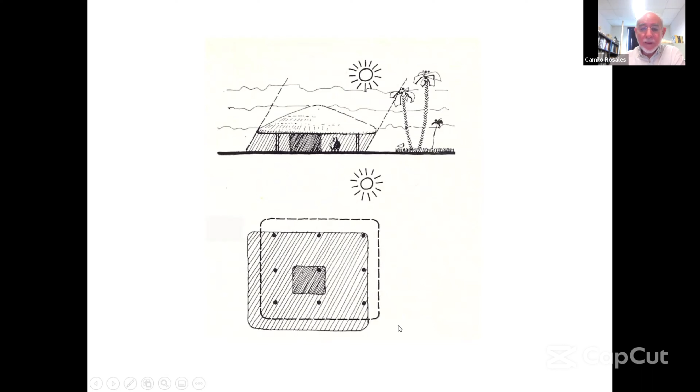So you can say that the tropics have two conditions that have been more or less common. Dry areas and urban areas in traditional architecture have what is called a courtyard house, surrounded a patio in the middle. But in rural architecture, the middle portion is the one that is private, and the surrounding area is shaded outdoors like corridors. This is not uncommon in the Americas. Probably Brazil has farms and rural areas that are not dissimilar.

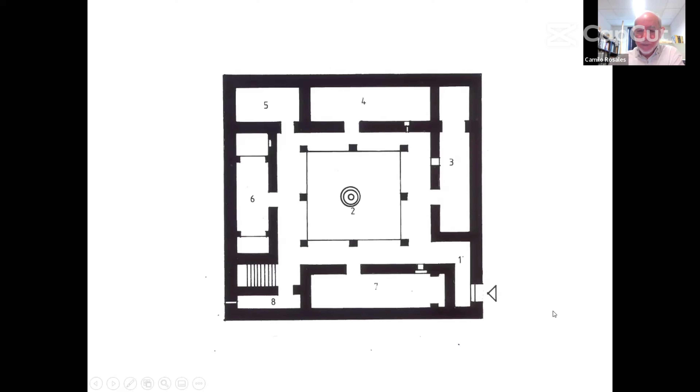So an example of a courtyard house that is very common in the Americas, with rooms and a corridor surrounding a central open space. And you got an example in Mexico, which is fairly dry, a good portion of Mexico, and not dissimilar than southern Spain.

The other one, which I have by the letter B, is not uncommon for us in the Americas. Some Indian tribes use this kind of architecture. Peasant architecture is like that. And there are versions that are more established that are not uncommon for Spanish and Portuguese settlements in rural America.

Well, I'm presenting this because the projects we have deal with this form of thinking, in which the structure is either surrounded by open space and a large roof. And this is the project we sent to Washington and the first two houses that I'm going to show you.

This is the competition that happens in Washington every year. It's for solar houses. And after the success of this one, there's been others in Europe, and I understand there's one in South America as well. In this, there are 20 universities competing for a prize, and they give you a small lot in Washington, and they give you the dimensions of the house. But the house has to exist without any support from utilities from the city, especially electricity. No electricity connection, no water connection. And so they have to be, as they say in English, off the grid, outside the grids of utility lines.

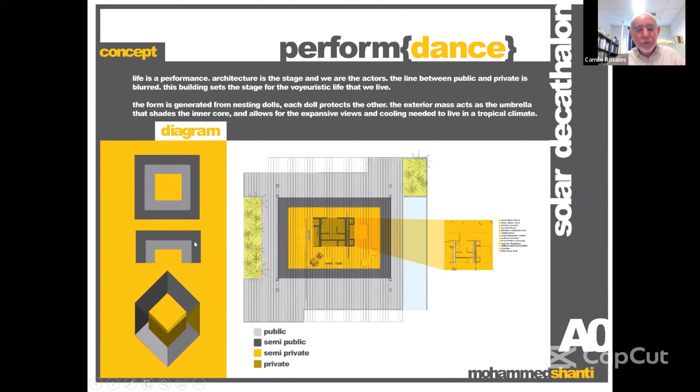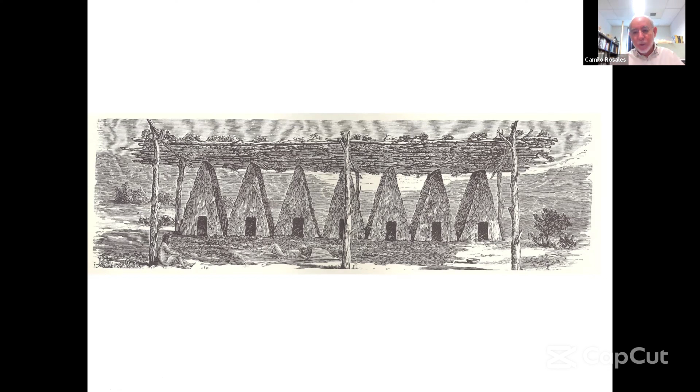And so this works fairly well if you think that this house has to be built in Miami, which is semi-tropical, and then transported to Washington, which is more temperate.

And so this is the diagram of the house with two roofs. The first roof with the sun roof is actually made for photovoltaic cells and capture energy in here. The second roof, which is the one in yellow, is the rain roof, which closes the building.

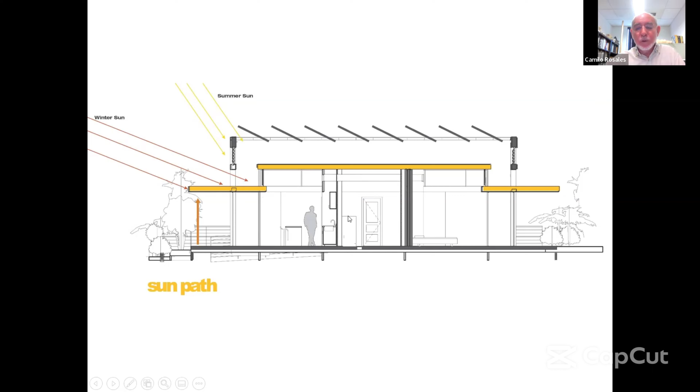And then between the corridor outside and the living space inside, there's an area in between here, which has two layers of glass, one layer here, another layer here. And then the middle portion, which is private, is where the bathroom is. So you get the plan of the house with two layers of glass, gray areas like some type of corridor. This pinkish area is the area for living, bathroom, and the mechanical system is here. And then you have a broad terrace around it.

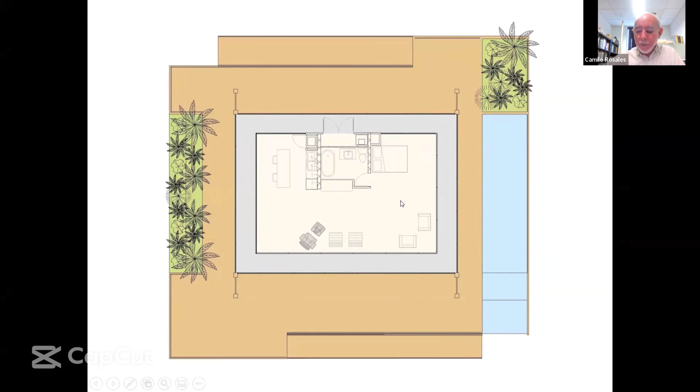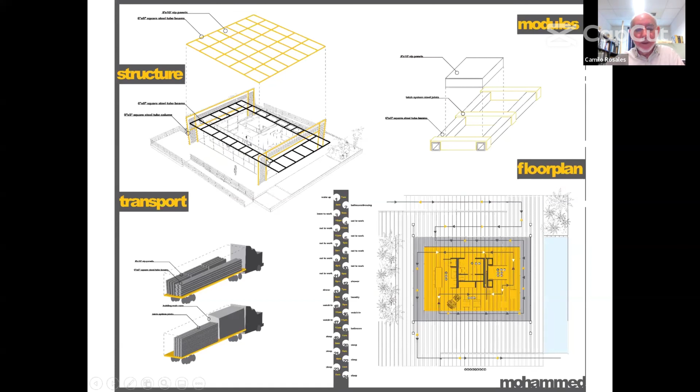And this is the way the scheme was planned. And I have a whole series of diagrams in which the thing has to be built in Miami, dismantled completely. It has to be done in prefabricated pieces, put on a truck, and sent to Washington.

And there's some more diagrams of what happens in winter and summer, or when you have cooling and heating. This space in between can open or close, and so allow breezes to pass through and cool the house. And this can be open and only one close, or you close both systems, and then they retain heat in the case when you need heating.

This is for water collection in here on the right-hand side. And the top shows the two suns that you have for different latitudes. The summer sun, more likely, Miami is more vertical, and this is more tropical. And the winter sun, which is more on temperate areas. So the building was to be designed that way.

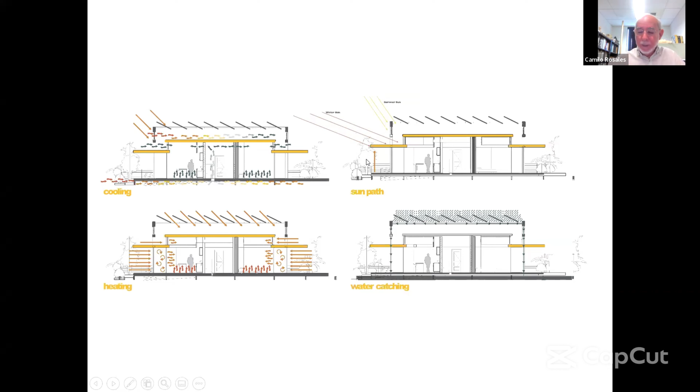And this is the way that this whole scheme is made into pieces, so it could be transported. This is particularly interesting, and I don't know what level of education you have at this point in architecture, but you may have encountered these systems already.

We use two solar systems. One that is called solar thermal, which is the one you see on the screen. This is to heat water. And the other one is photovoltaic, which is to capture energy from the sun and produce electricity.

So this one produces hot water, which is immensely important because hot water is not only for bathrooms and in your shower that you have in this tank. It also can be transported to what is called an absorption chiller, which uses heat to produce air conditioning. So with hot water, we produce air conditioning. And air conditioning can be done, then from this point, the air handler that you have here is made into ducts and goes to space as fresh air.

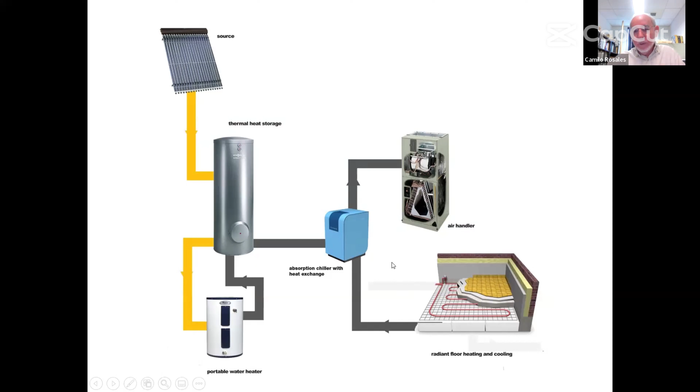But the same hot water can be used in winter for a radiant floor. So you have the piping in the floor and it produces heat. So the same source of hot water can do this couple of miracles. On the one hand, it produces heating for a northern latitude, and on the other, it produces also air conditioning.

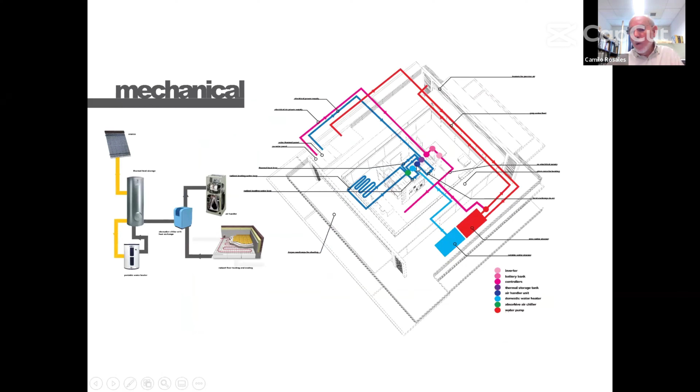So you get here a diagram of the two systems operating from the mechanical room. And I won't talk too much about this.

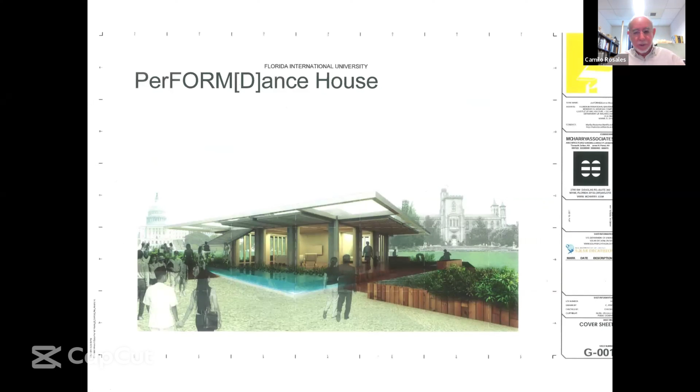And this is the last picture of that scheme that was not selected. The one that was selected was this one, which was cheaper to build. The other one was actually quite good. It had a lot of support, but then the group jurors, because we invited a group of people to decide on this, decided on this one, which was a little simpler.

And this was built. This is the one we have right now at FIU after moving in, washing and getting some repairs. It was permanently built on our campus at FIU, and it's serving as the Office for Sustainability.

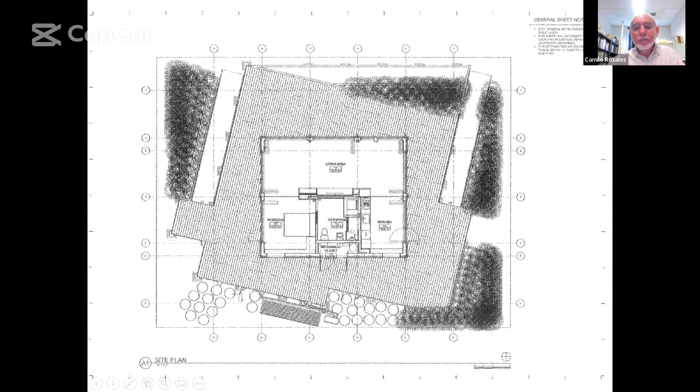This one is kind of intriguing too. It's got some interesting points. The first thing is that they look very much similar. It has a private area with the bathroom and an area with a mechanical system. All the living area happens around, but it has only one scheme, not two like the other one. And then a large terrace around.

It has photovoltaic cells as well, and it's got a large solar collector for hot water.

But this did differently than the other one, having a great deal of insulation. Instead of two glass skins like the first house I showed you, this has a very thick layer of solid insulation that prevents this house from overheating or overcooling. It also has louvers that open and close for shading.

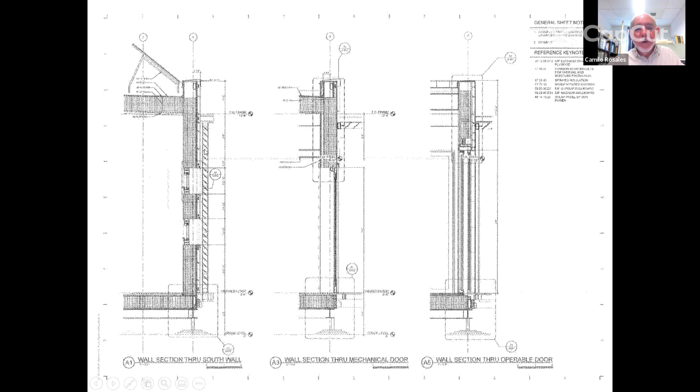But also in Miami, we have hurricanes, as you may know. So these shading devices also act as hurricane shutters. You see the hurricane shutters there. If I use my pointer again, these devices roll inside and then come down, collapse down, and close the glass. So it works for hurricane-prone Miami, and also as a shading device for whichever latitude we choose.

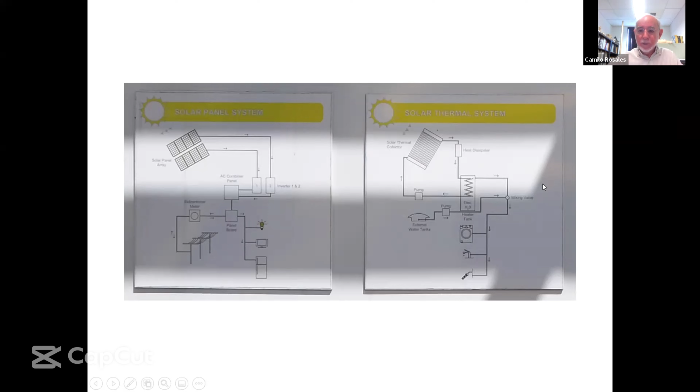So these are the last pictures of the house. I'm going to show you the interior. It was done very nicely.

But one element I haven't mentioned is that this was done by students, physically working by hand. The last components were done by a professional group, doing the metal work, which we could not do on campus. But all the carpentry, flooring, lighting, and so on, all this was done by students like you, and that was very nice. It was a whole year of work. Many students worked on this project, maybe as many as 60 at different points, because it was different classes—one class did one thing, another class did another thing. It was very rewarding from that end.

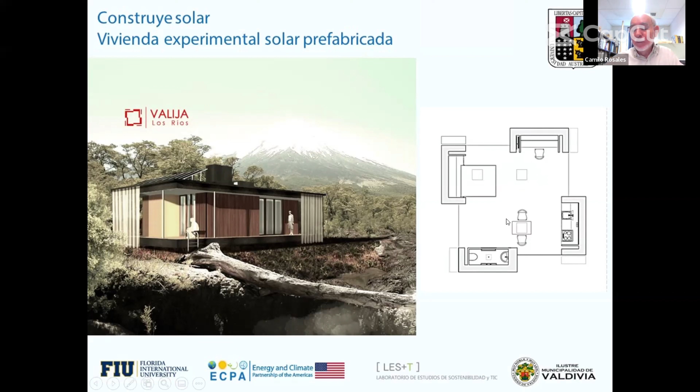You have a toilet and a lavatory, and then the shower in the middle. Then it's got the bedroom, which is a collapsible bed that can be stored back. And it's got a desk with computers, with space in the middle for living. Very, very nice plan, man.

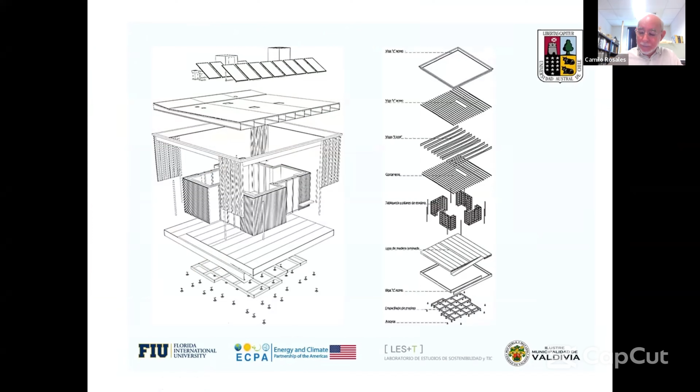This was not built, but it was designed in such a way as to be transported, like if it was going to compete with the solar decathlon in South America, like the one I showed you in Cali. The one that was built was this one, which is a house more for the climate of Valdivia, Chile.

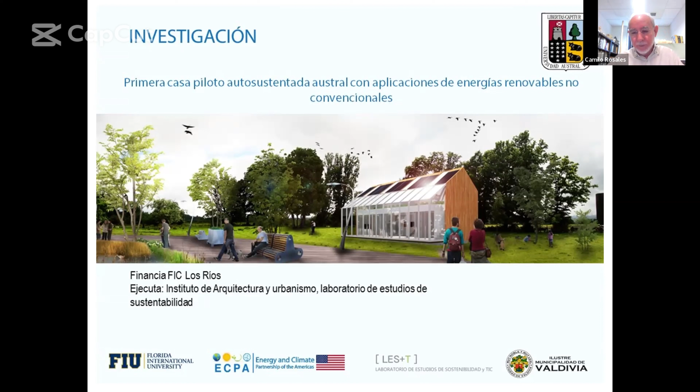This is for a cool region. The south portion of Chile is fairly cool. It's got long winters, about 6 months. And so the thing here was to collect heat instead of produce air conditioning, like the one we have in Miami. And so you got a 2-story house with plenty of skylights.

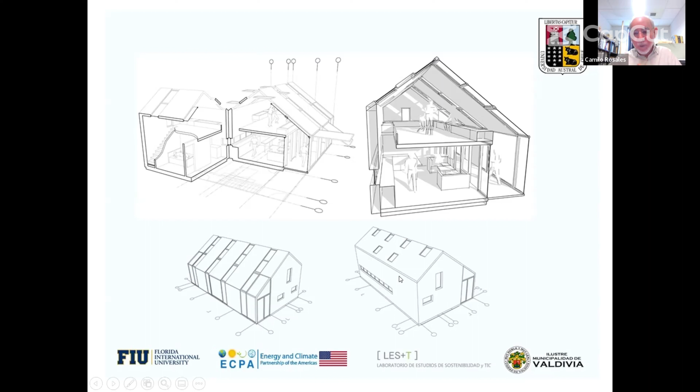You see the skylights are enormous, man. These strips here, sorry, the strips are there in the roof. And you got skylights also here because the idea is to collect heat, to attract the sun instead of putting shades like the one we did in Miami. So it's a totally different climate.

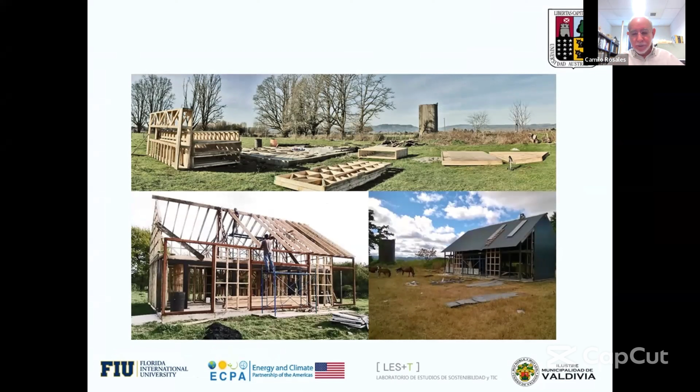And when I left Valdivia in 2016, they were completing this. Unfortunately, I never got pictures of the house completely finished. But it was a very beautiful project done with wood. It's a wood producing region in Chile. They have a fantastic forest. And so they took advantage of that.

So my second part of the presentation is on energy savings in municipal buildings. This was a grant by the Department of State, a fairly large grant for academia, and involved 3 municipalities in 3 different countries. In Valdivia, where I was also participating in the solar houses. In Goiânia, Brazil, a place I didn't know and happens to be much bigger than what I thought. Very nice people, and I met your professor there, or through them, I met her. And then the last one was in Trinidad and Tobago.

Now, this is different than our normal practice of architecture. Our normal practice, we have a client and we have engineers. But when you do public buildings, municipal buildings, in which there are many more stakeholders, the group is far bigger because you have now aspects of the general public. You have building owners, you have planners, you have state government components, you have engineers, landscape architects, utility managers, code officials, and the public in general.

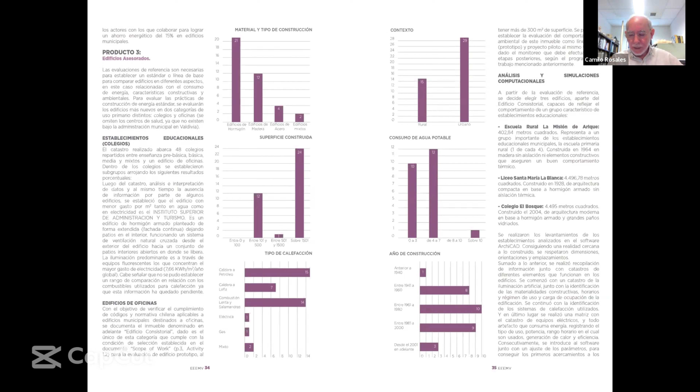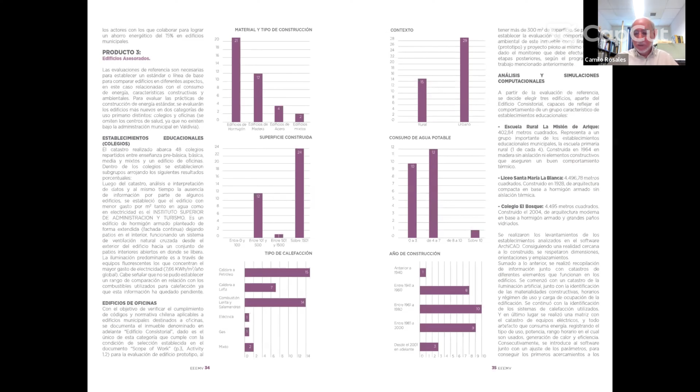And these parameters are very complex. It requires a lot of data. And so the collection of data was enormous. Spent months trying to do that. So in Valdivia, the challenge was to lower energy in about 50 schools.

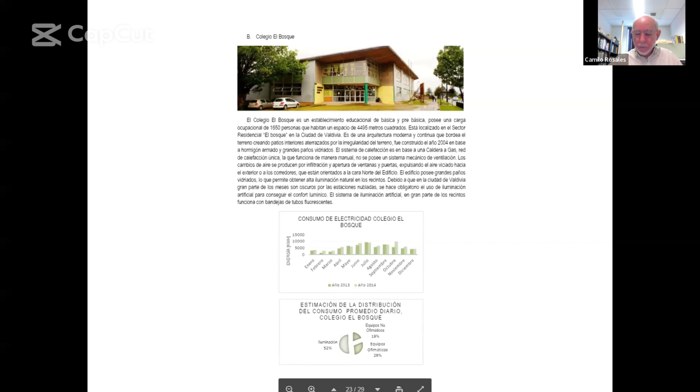This is a synopsis of something that happened through many iterations and measurements over a long time, like the number of people using the building. You have 39 professors, 20 assistant professors, and 500 students. Then we made a record of every piece of equipment they use, like fluorescent lamps.

Most of it is about lighting, because Chile has that difficulty. Most of the schools had lighting systems that were kind of warm, and not good for energy savings.

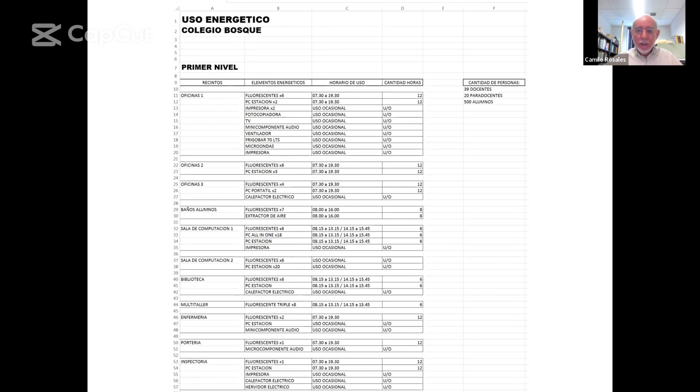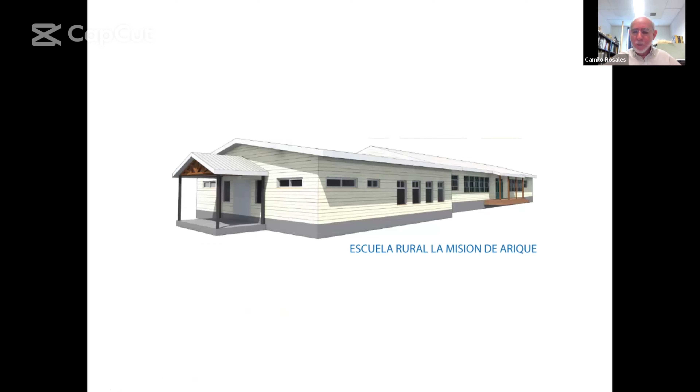We spent more time on this rural school, a very small school in the outskirts of Valdivia, actually a nice little school made of wood. We did the same thing, checking with them the amount of energy used in different ways.

Are you following at this point? Everything okay? Hello? Sí. Is this fine? Is it coming through? Okay, excellent.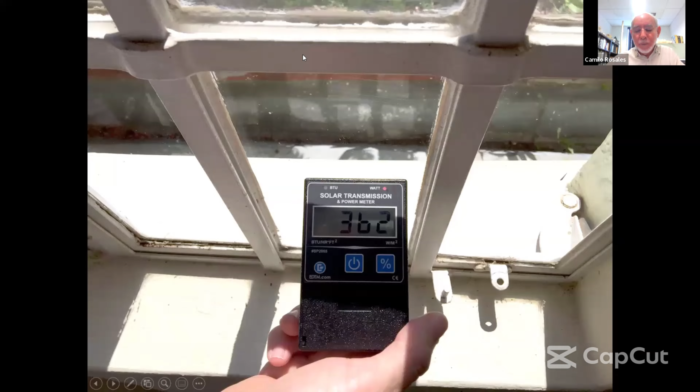The second measurement was done with the insect screen, and it's dramatic — from 362 BTUs down to 82. And if we put blinds, Venetian blinds, it drops again, meaning that with some simple measures, energy could be managed and curtailed.

This is extraordinary in the sense that a simple building with simple measures can do quite a bit with solar energy — not only for producing energy, like in the solar houses, but also preventing energy from coming through the building and heating it.

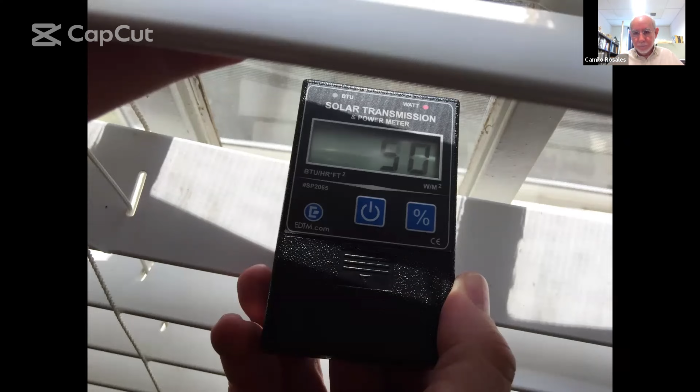These were more measurements, and we realized that the great problem this little school had, or at least one of the greatest, was illumination — lighting. You have 81% here, pointing out that most of the energy was coming from the lamps they had.

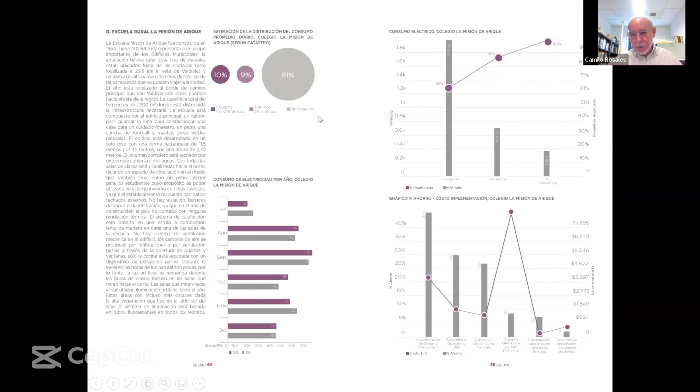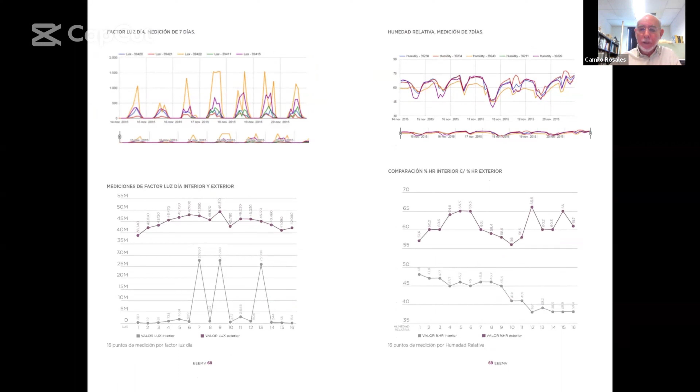Then we measured the amount of solar light — not energy or heat, just light coming through the building, checking the windows. We made more measurements throughout the year. As I said, it's an immense amount of information that was recorded.

For that we used various devices. This one is a little monitoring plant that checks the climate and the amount of solar exposure. The beauty of this is that we could review the information in Miami — we put this little plant in Valdivia, and via internet, reviewed the information in Miami.

We also put sensors in the windows, and these sensors record the temperature passing through and the amount of light. We could also see this information in Miami.

We also used what is called a FLIR camera, which is common equipment used all over the world — not necessarily new, but very handy. With this you see the amount of energy passing through the skin of buildings, to see how well sealed the building is, especially around doors and windows, the little cracks that sometimes happen, allowing temperature from outside to penetrate inside.

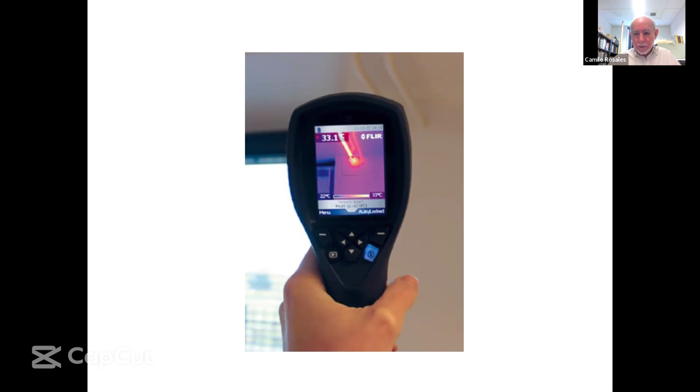In the case of Chile, the problem was heat — they need a hot building, and those cracks allow cooling to pass through. Light and energy in that sense were also recorded, as I said, along with more data.

I'm just showing you the number of ways this was recorded. In this case, it was a little section with a tabulation of the amount of light passing through.

In the end, we managed to seal the windows better, change the lighting system of this little school, put blinds where needed, and achieve a good amount of energy savings. This was a day of celebration when the school received a certificate.

This is the school principal with a certificate showing they achieved an energy saving of about 20%. The staff of the school are happy with the condition, and the school kids were celebrating with the mayor of the city, the principal of the School of Architecture in Valdivia, myself, and others who helped with the project.

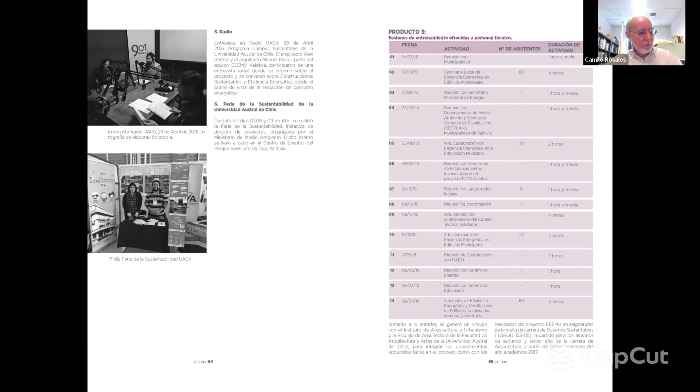This didn't end there. It was actually a very good program because it allowed us to receive funding for talking about this to the general public, instructing them. There were many sessions with the citizens of Valdivia about energy savings. Pamphlets were made and presentations given in different schools. There was also radio information telling people how to save energy in simple ways, not too complicated, along with small publications.

We got a few of them there. There was also press coverage in the newspapers announcing the program of energy savings. And then there was this little card that was made, to be distributed in all schools and so on. They're very easy, even made for children or school-grade individuals.

This didn't happen one after the other - we actually did the project together. The three municipalities worked simultaneously.

This was done in Goiânia. And wow, what a big city - I wasn't expecting it at all. I knew about Brasília, obviously, because of its new architecture, but not about Goiânia, which is very close by, towards the middle of Brazil.

Then I took this picture from the outskirts, and wow, what an incredible skyline. It's a big city - we don't have big cities like that in the Northern Hemisphere. Really, this is a very big city, at least the skyline looks like that.

This is what was written initially by the first group that participated in this project. Then the first group changed because the principal, Eric Rosa, moved to the United States, and another person took the helm, who was very nice to work with.

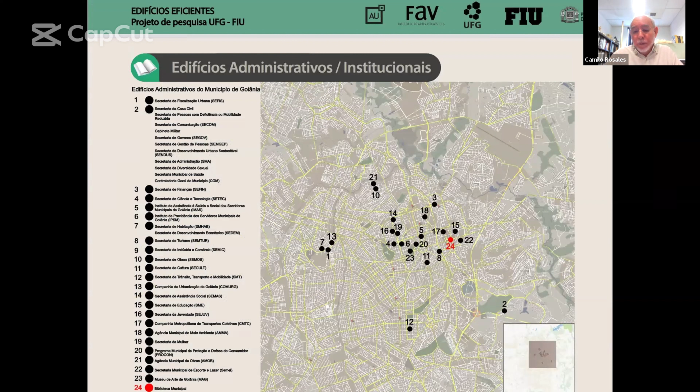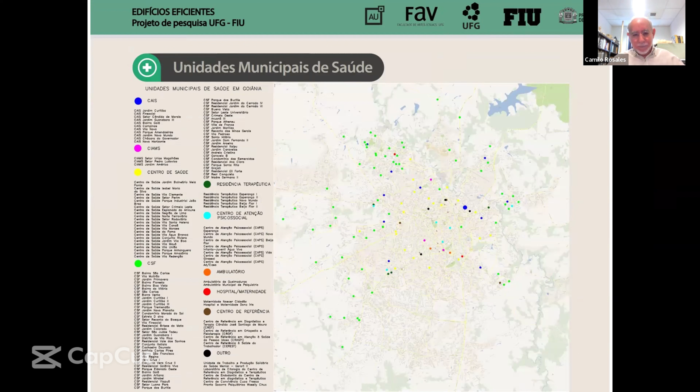I counted 24 there, and on top of that, there were other municipal buildings related to health - hospitals and clinics. So it was an enormous task, a project that was obviously very difficult to achieve, even from the beginning. That included also a library, in a modern building of some interest.

At this point, we had a change in the people involved. I'll point out that your professor Lloyd is there with Carla Emanuela Ribeiro, the person we dealt with most. But both of them were involved, and it was an incredible effort from both institutions.

This is now a description of the equipment that was provided. I've shown the equipment in Chile, but it's a little better explained here - with the thermal camera and laser dimensioning system.

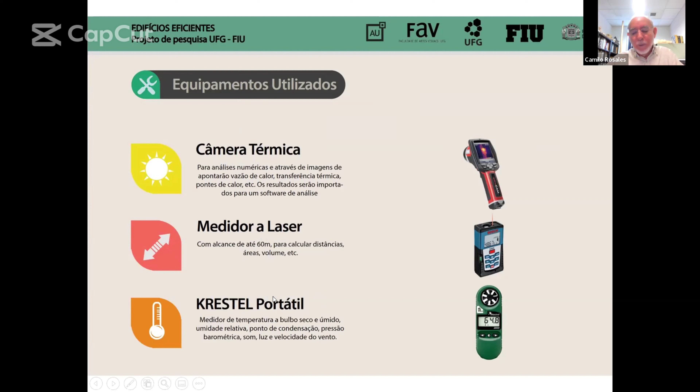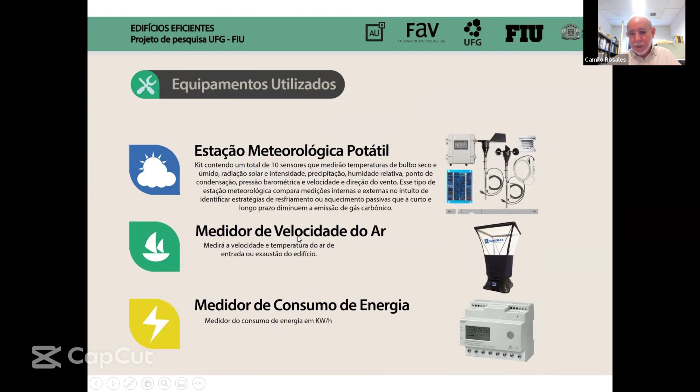This is to measure temperature, the KRESTEL. And then there was the meteorological station we had, like the one we had in Chile. This is a way to measure the velocity of air passing through openings, like in a door. And then a way to measure energy with special devices.

This is just a depiction of the thermal camera. What you see with lights in the windows are areas that have cracks where temperature can pass from one place to another. Very important, especially in cool conditions where cool air can seep in, but hot air can also seep in. So sealing the envelope, closing those cracks, was important in this demonstration project.

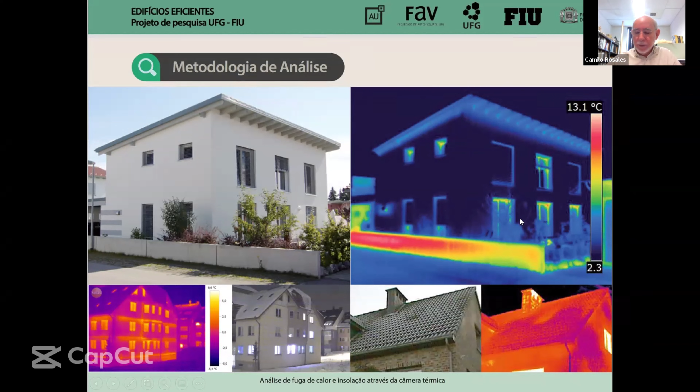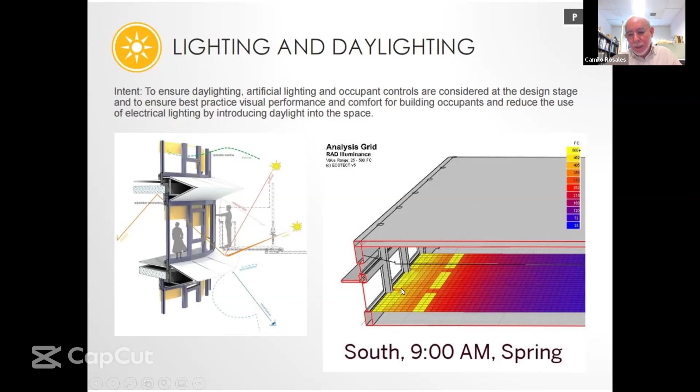Also the idea of natural light, how much light enters a building, is very important. We know that depends on the height. The higher the building, the more light penetrates the interior. The lower, the less light.

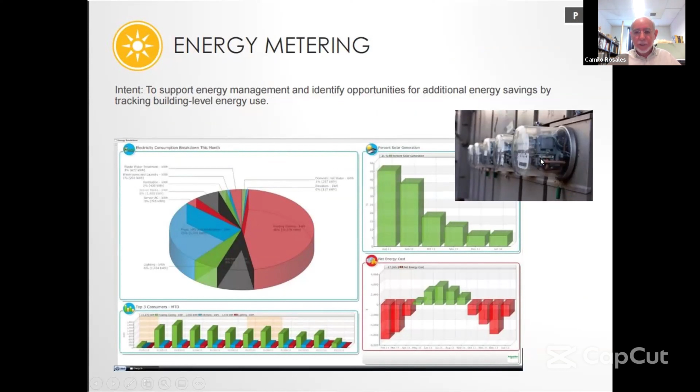Very important because this saves energy when you have natural light. And this was a tabulation of the energy used. We wanted special meters, which you have here. These are special meters that we could monitor from a distance. Put the meter in Brazil or Chile and monitor it in Miami. And then the whole idea of producing energy, like the solar houses that I showed you.

This is a very important component of the whole strategy that we saw very well in Brazil. There are many systems to measure the use of energy and sustainability in general.

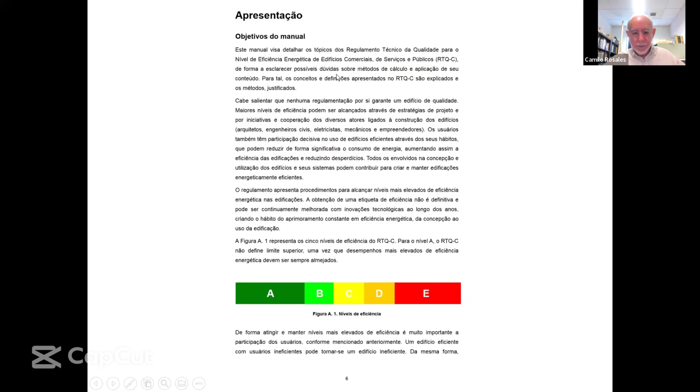We found this manual, which is very good. We read it, it's excellent. I think it's called, at least in English, RTQC. It's pretty complete - simpler than LEED and the others, but quite efficient.

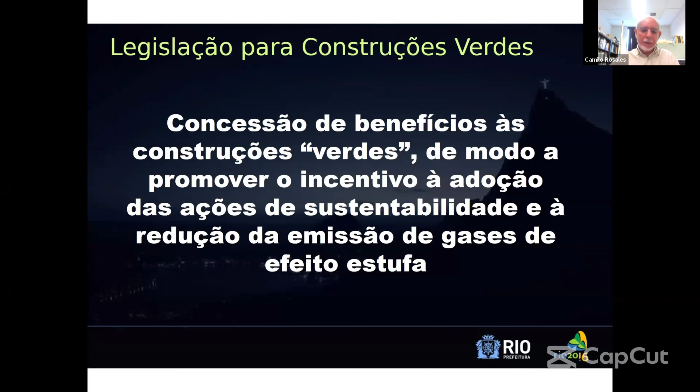We also found that there was one in Rio de Janeiro, Quali Verde, simpler and very practical. We found this stuff - this is meant to be for the general public, I suppose, not exactly for professionals. We were thinking, why don't we use some of these things in Brazil since they have it?

So our objective was to combine both - the best of both systems: the one we brought from the United States and the ones Brazil has already spearheaded. I was told by my colleagues in Goiânia that although these things are known in Brazil, they are not that much used, which is a shame. I can say the same with the United States - don't think that we are doing so much better.

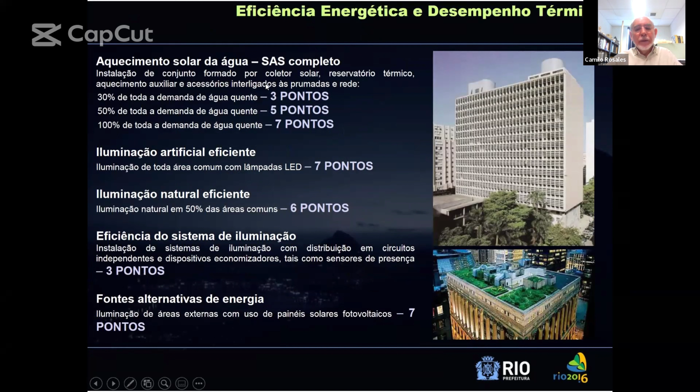But this was also a system of points. It will give you points if you reduce water consumption, if you reduce hot water, and you get a number of points very similar to the system that we brought with us.

We also found that the electricity company in Goiânia had pamphlets and leaflets telling the general public, or people who went to the office, how to save energy. And they have this little maquette here with dots or buttons that will tell you how much a kitchen will consume, how much a bedroom, and so on and so forth.

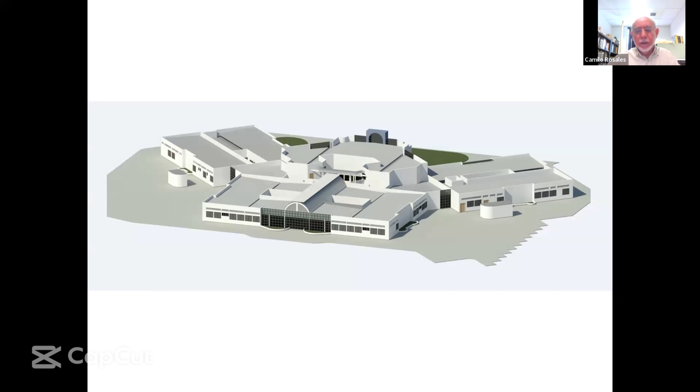There was an awareness that we were pleasantly surprised in Brazil that there were efforts already in place, except that the general public did not know much of them. So we did our exercises, centered on some clinics. There were a few of them that we designed. I went to find information on average consumption, and we did similar things. Each country did its own take, its own way.

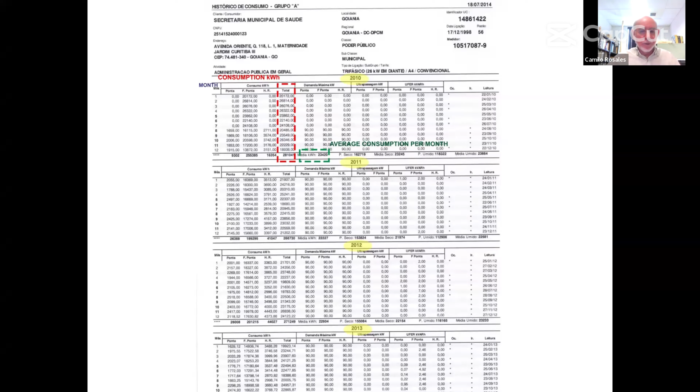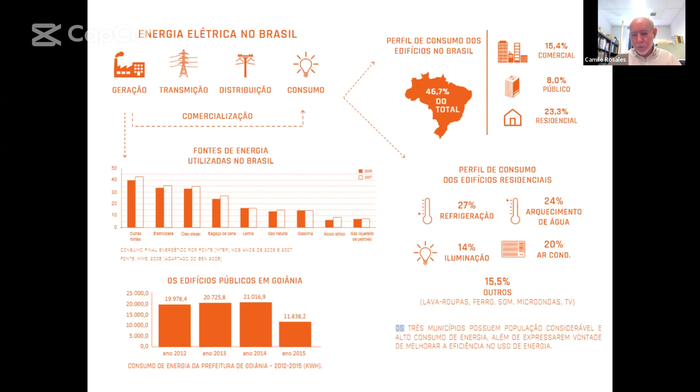Then a little leaflet was published that was planned to be given to the general public. I don't think we succeeded so much in terms of making a much larger presence with our grant. Goiânia is big, we had a lot of municipal buildings, and so we only penetrated a little bit. But at least in the school that we were associated with, this was known. It went to the students, which was a good thing. I understand there have been efforts after our project that continued at the student academic level. This is also one of those leaflets distributed for the public.

Finally, the case of Trinidad is a repetition of the others, except that here we worked with a professional office. Trinidad is in front of Venezuela, the last island of the chain of islands in the Caribbean, from Cuba all the way to Trinidad, being the last one. This is like the tail - if Cuba is the head, then this is the tail, or you can say the reverse.

Very nice island, tropical, very, very hot throughout the year. So we were concerned here 100% with air conditioning, no heating whatsoever. We also took a municipal building the same way - this one was a municipal office for sure, and there were some clinics. But the company we worked with was a professional company, not a university. It's interesting - the university we tried to engage was very difficult. They didn't have time. We spent about 6 months trying to rally a group of professors. Impossible. So we decided to go with an office that was already settled there, and they were excellent. Really, they have a very good program, especially monitoring.

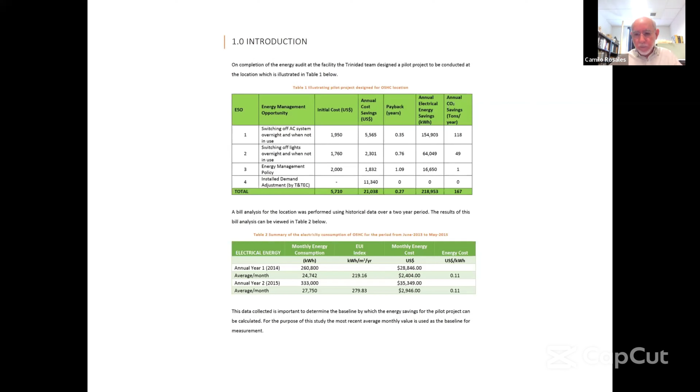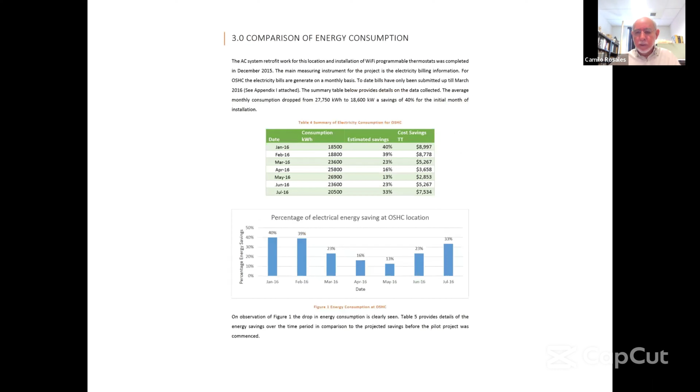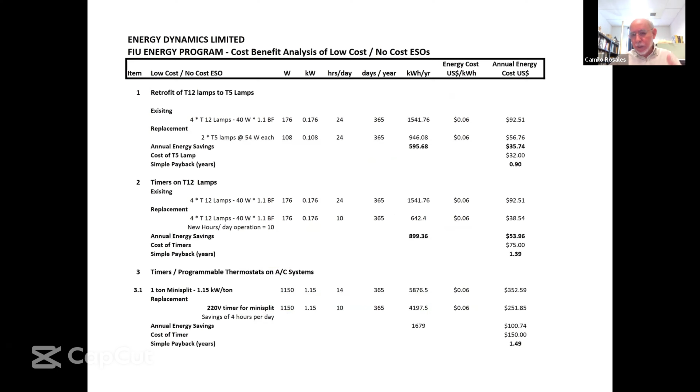What we were doing in Miami, they were doing in Trinidad and Tobago. They would install sensors in the buildings they had hired or had contract with, and were monitoring the energy use on those buildings from the central office in Trinidad and Tobago, working in all the Caribbean. It was great to see an office doing what we were trying to do in the first place, with these measurements and so on. I won't take much of your time on that. The data was excellent - they had the charts already because they do this normally for all the clients. These are the buildings involved, the Ministry of Public Utilities and some large buildings like this one. So overall, we were combining the data, learning from one place to another.

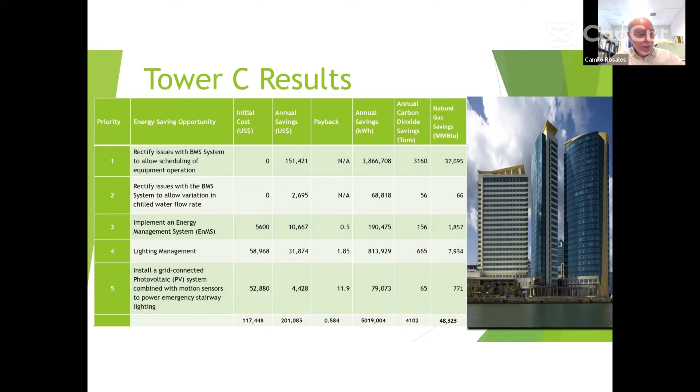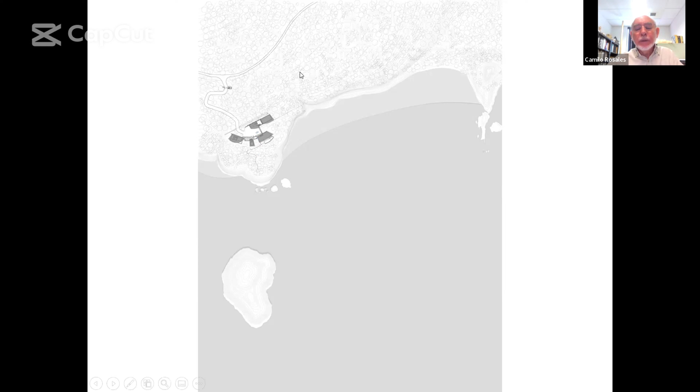The location was selected because there was another building here before, so we don't destroy the forest. The owner wanted to have the house in the middle so he can look at the bay, but they have been destroying the trees here. So we decided to go here, which is very nice, between two bays, one here and another here, and in front of the island.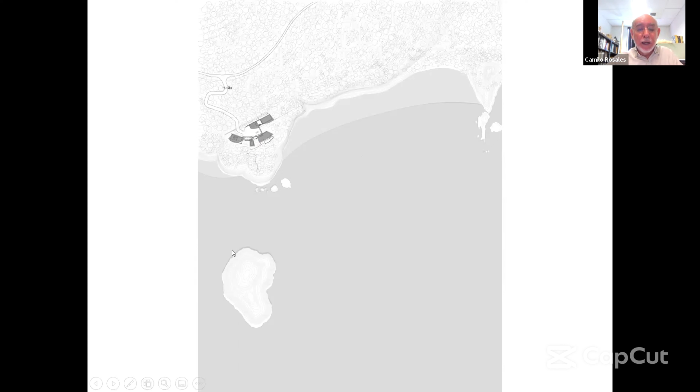So this is the house that's built from one extreme. The house is there.

There were trees on purpose left in front for two reasons. One, for ecological reasons, because the fauna, the animals in the area, could travel in front of the house and behind the house. If we cut the trees, some species will be cut as well. So we decided to leave the house with the forest so that animal life would be less interrupted.

The other reason was to produce shading so the building would not warm too much, and in that sense we use a passive system instead of an active air conditioning system. The third reason was that the owners wanted privacy. They didn't want the house shown so much.

The concept, using architectural words, is that the house was going to be about the same height as the trees and be open as well, so the landscape would be continuous.

The house has no air conditioning in the public areas. The wind will pass through, and the same height of the house is similar to the height of the canopy of trees.

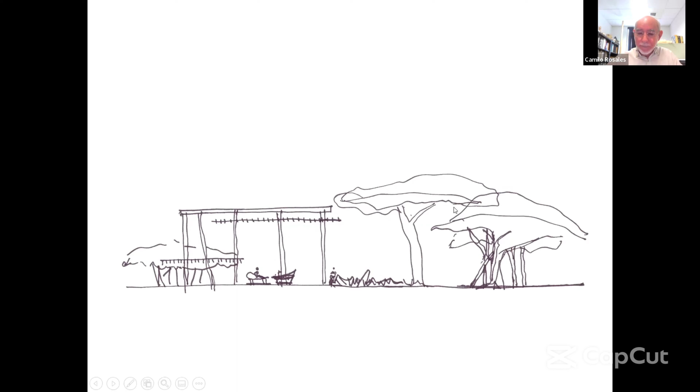This is the section, which is quite dramatic because there's a big drop between the house and the water. The house has two wings: a portion is the social areas, then there's a tower, and then there's a dorm behind that. The other end has the staff quarters and the children's quarters. In the middle is a plaza for cars to turn around.

The tower is important because we didn't want to cut the trees. You can see the ocean from here down, but it's hard to see the horizon because you have the trees in the middle. So we made the tower so you could go above the trees and then connect with the horizon.

The geometry of the house comes from the bay itself. This is the large bay in here, and then there are small little elements like that and like that. Even the shape of the peninsula here is like that. So the house took that shape. This is an inversion of the area of the peninsula and the area of the bay.

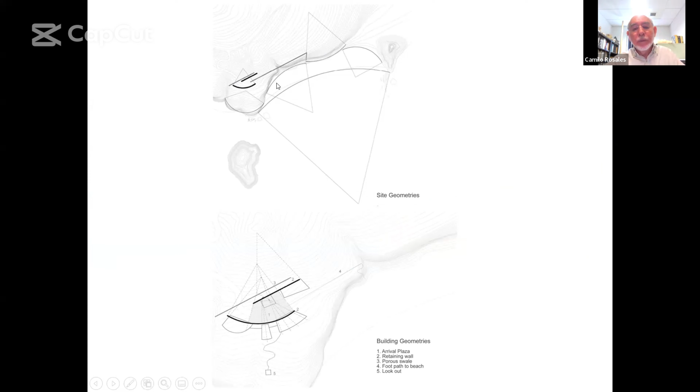And then a sub geometry came later from a magical point, which is the hill, the topmost portion of the house, which announced the way these elements were going to be playing.

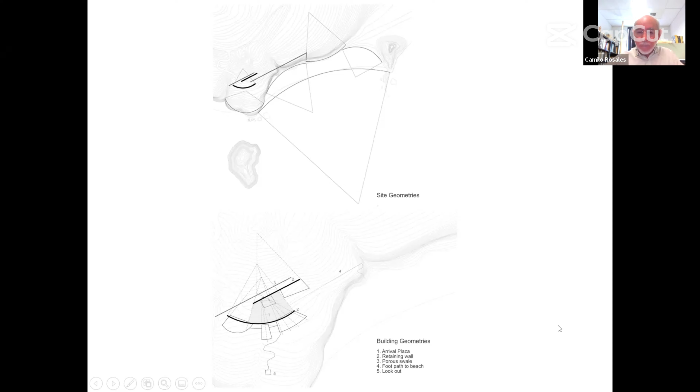This is the plan of the house, which has on the extreme right a wing for the social area, completely open, no air conditioning. This is the tower in the middle, and the basement has two enormous refrigerators because there are no towns around this place, and the owners have to store food here for a long stay. Above is the master bedroom.

Number 5 shows cisterns to collect water, so water from the roof will be collected here. Also, almost as important, is collecting water from the hill. If I follow my pointer, it goes into a trough here and then collects in number 6. This is not clean water, but it can be used for irrigation.

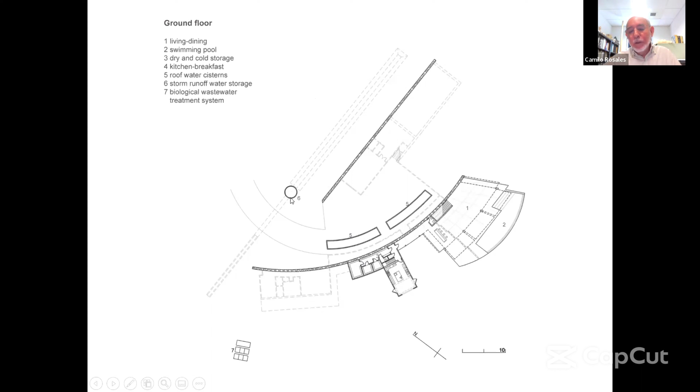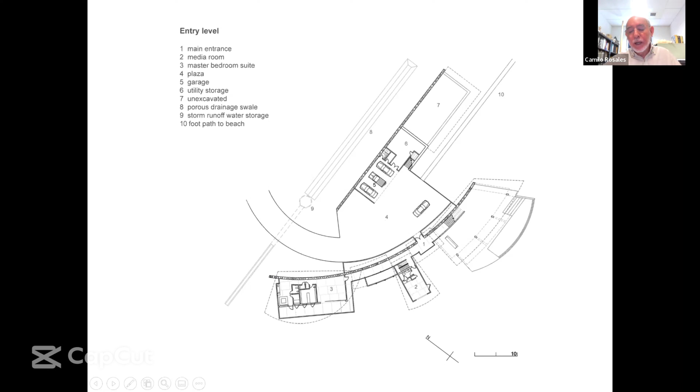Following the first floor, this is a hilly site, so it's very hard to turn around. We had to create a plaza in number 4, so a car can go into the garage, turn around, and return. This is the master bedroom here, and these are bedrooms in the tower. This is the canal to collect water for the cistern.

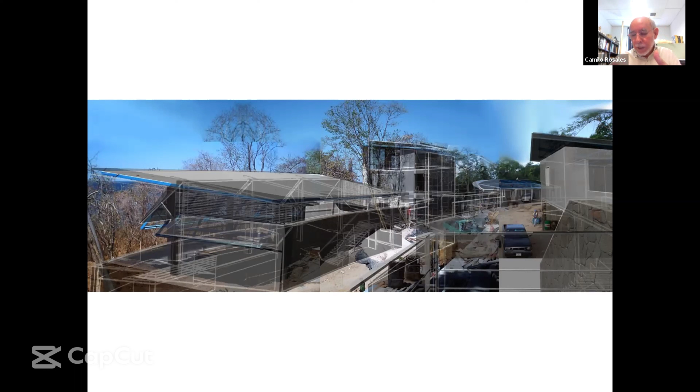I was based in Miami, obviously my office is in Miami, and I asked the contractors in Costa Rica to keep sending me pictures of the progress of the work. We have a digital model in Miami, I'm sure you do the same in Brazil, and I was superimposing the pictures sent from Costa Rica with my digital model simultaneously. So I could look at the progress of construction from Miami without having to visit the site so often.

You can see here that this is an absolute coincidence. It's fantastic, the digital model was fantastic. Absolute coincidence between the model itself and the picture that was sent. One is like a skeleton and the other is the picture.

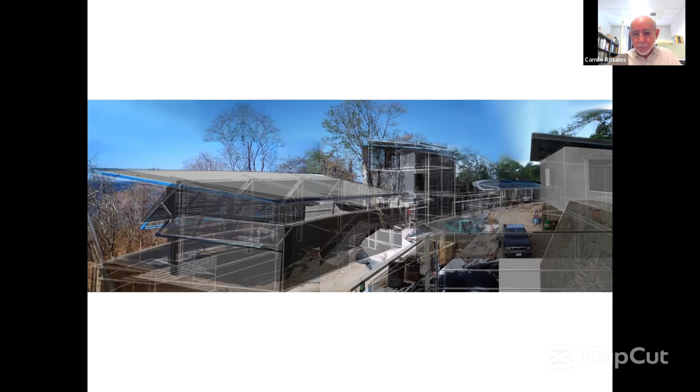And this is the house as built. These were local materials - the stone comes from the area, the woods come from the area. The only thing imported from France was the roof, because this roof is made with lead.

I don't know if you can translate - lead is the material they used, like the dome of the Roman Pantheon. Plumbum is in Latin, plomo is in Spanish, and lead is in English. This will be a very long-lasting material, lasting maybe 30, 40, 50 years.

And so the house is completely open with enormous solar shading devices. It's uninterrupted - you see the line of trees passing through it.

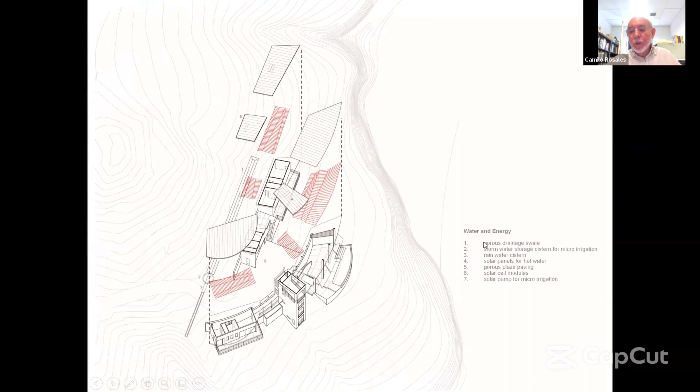Then these are the water and energy package that we have. I can read it to you quickly. One was a porous drainage swale, and this is one here. This is the hill coming from here - water comes down like that, is collected here and sent into number 2, which is for irrigation.

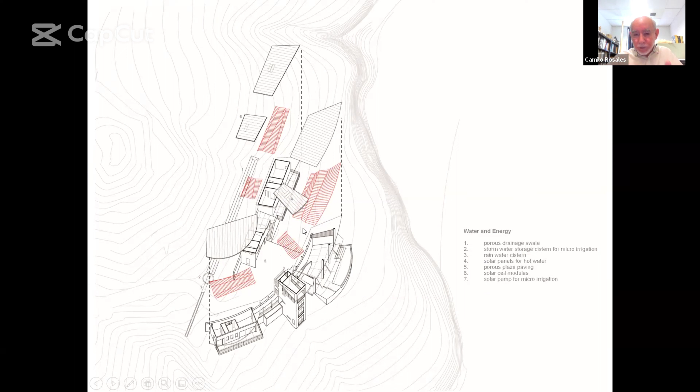This is the stormwater cistern. Then the rainwater cistern is in here - this collects water from the roof. There were solar cell modules on the roof to produce energy, and there was a solar pump for micro irrigation. So some of these energy-producing elements were there.

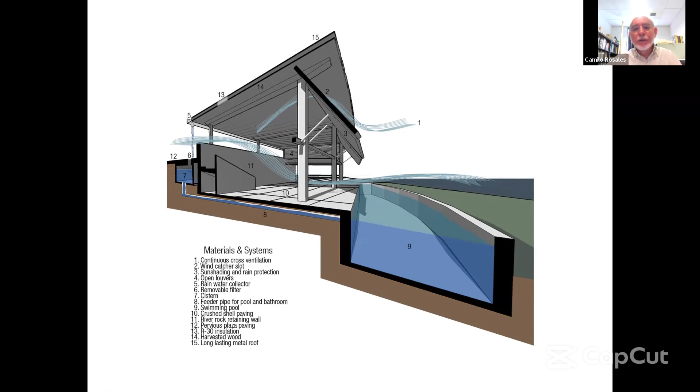I got one more diagram for that, in which you have the roof collecting rainwater. It goes into the cistern, and the cistern feeds the pool - it had to be treated with chlorine. This is the normal ventilation from the top of the solar shading devices, and this window here. There were all the elements there - especially insulation, we used very heavy insulation to protect from heat.